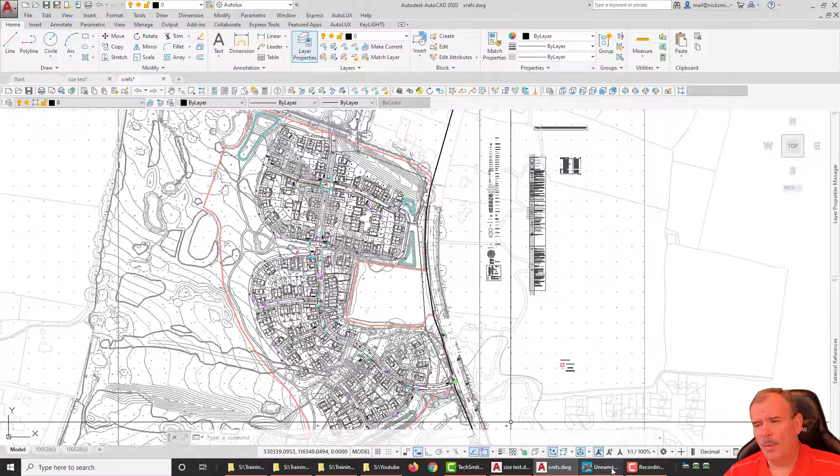When they're used well, they shorten design time and so on. So when a drawing is initially loaded into Lighting Reality, or for that matter into AutoCAD, it looks for the external references in the original location. If it can't find them there, it looks in the folder where the drawing you just loaded is saved from, and that all works fine.

In this case, it's come up and said the drawing exceeds 500 layers. There's nothing wrong with that—it just means there's more than 500 layers in the drawing. It's to do with this dialog box here, where you can edit things, and we're limited to 500 layers in that dialog box.

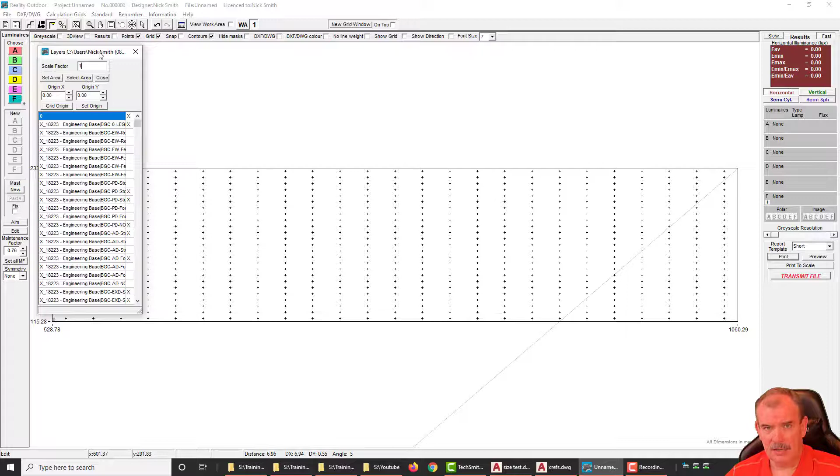So if I go to set area—I previously worked out that this drawing was actually in meters—I'm going to select, as you can see, I've got an object over here that's causing all kinds of trouble.

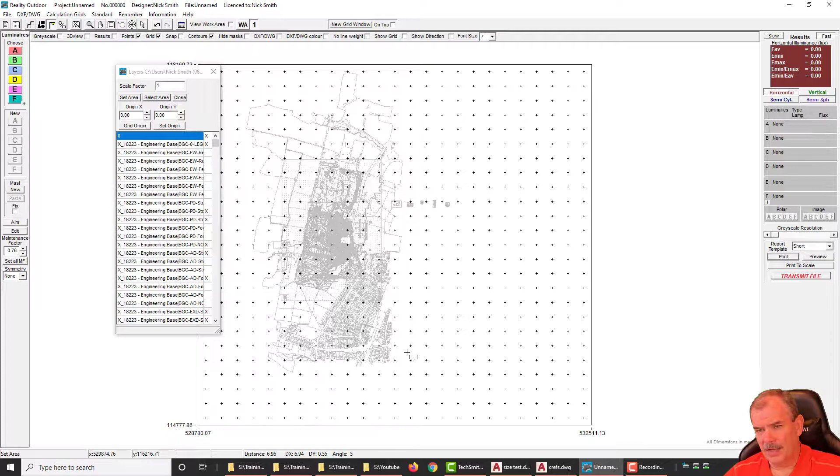Go to set area, then select area to zoom in on the area of interest. There we go, then select area again, and we can go ahead and do the lighting design in the normal way. You'd obviously set your grids up and so on.

But when you save the drawing, I'm going to save this to projects, and I'm going to call this XRefs 2.

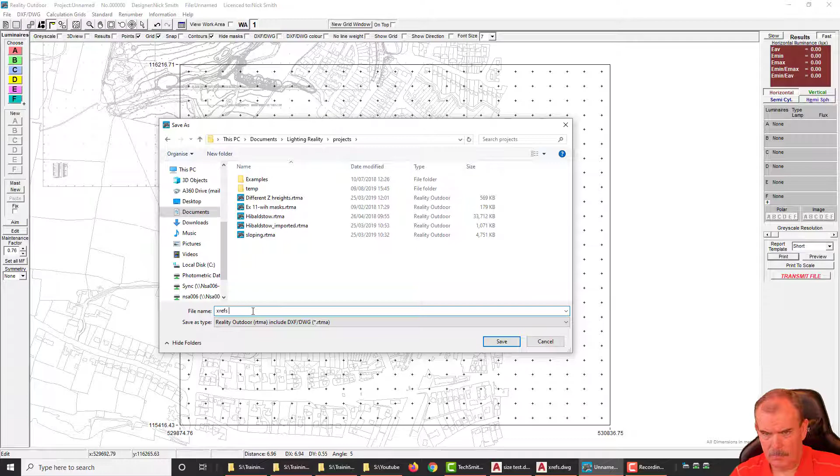So if we now go back and load that project up that we've just saved, what will happen is it doesn't load the drawing from the original location. It loads it from the project save, and we do this deliberately because if you sent that project to somebody else...

They obviously won't have the drawings in the original locations, and as such they need to be able to load the file so that they can see what's going on in the drawing.

But what you can see is that there are parts of the drawing that are missing, and that's because the external references have not been loaded. So if I go and reload the drawing, that will force it to reload from the original location, and it should reload all of the external references as well.

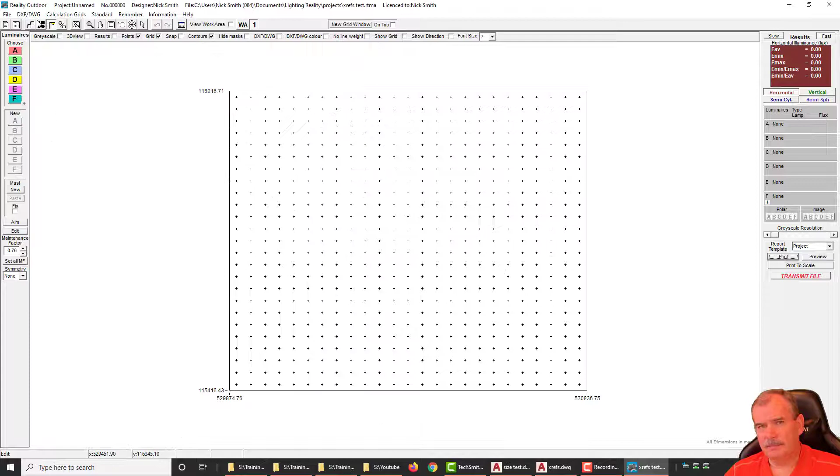Being really honest about it, I spend a lot of time fiddling around with drawings, getting them into the right scale, and also binding in external references.

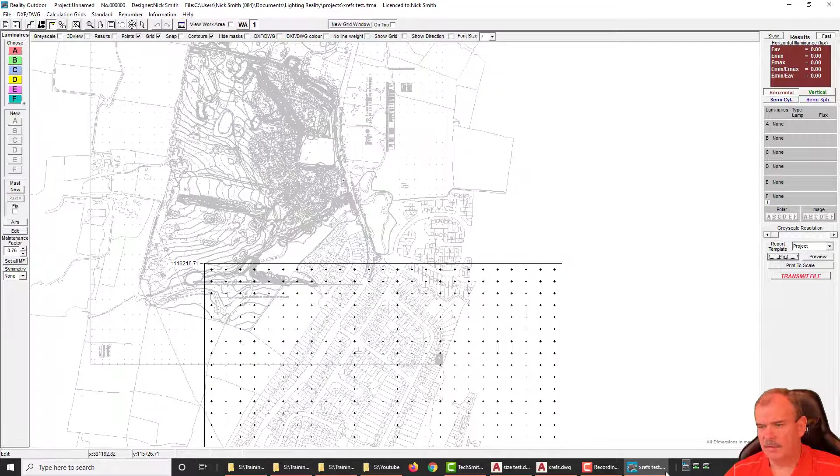So if I go back into CAD and select this drawing here, so you go into here, bind the drawing in. What that does is, rather than being an external reference, it actually brings it into the drawing itself.

And then anything else, you can also detach the other information as well, as necessary. I suspect that's gone onto a layer that's hidden, which is why it hasn't worked. It's a huge drawing, this one, so I'm not going to mess around with it too much.